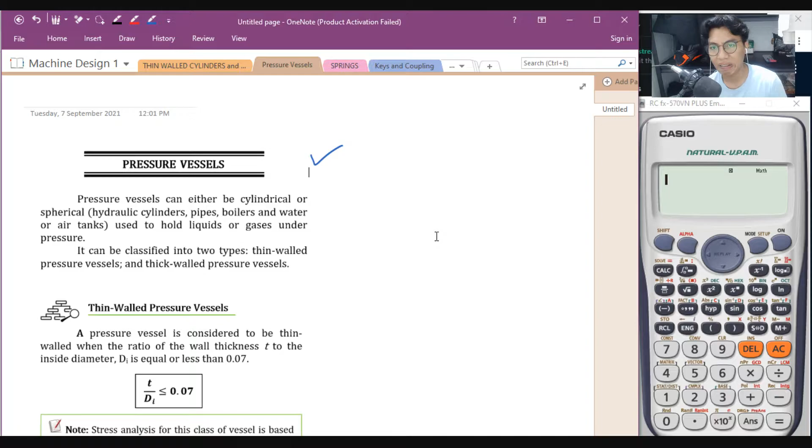Simple. A pressure vessel is considered thin-walled when the ratio of the wall thickness T to the inside diameter is equal to or less than 0.07. Anything beyond 0.07 - the ratio of your thickness to your inner diameter - you can say it is now a thick-walled pressure vessel. So before you solve a pressure vessel problem for its bursting pressure or the stress of bursting...

Check first if it falls correctly within the boundaries of the ratio of 0.07. If it passes that ratio, or is lower or equal, you can say it is thin-walled. If not, then that is thick-walled.

So there are two types of equations for thick-wall and thin-wall. But note, the stress analysis for this class of vessel is based on simple stresses only, or if the stress is uniform in distribution.

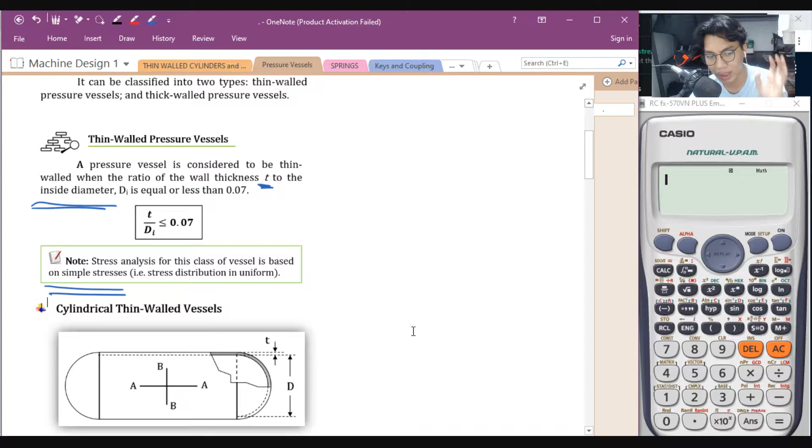Okay, let us go with the cylindrical thin-wall pressure vessel. Sir, what is cylindrical? Again, going back to your solid mensuration, cylindrical pressure vessels are those which have a head or a base that is circular.

Circular is your base. And that is stretched to an element or a height that is perpendicular to it. So when you make a pressure vessel, it does not come simply - it's not a cylinder right away.

For large pressure vessels, it comes from a thin sheet of metal that is formed into cylinders or into spheres. And that material will have a certain thickness, based on the bursting pressure or the amount of pressure that it will contain. We're not allowed to use a material that will not pass the test for where we will use it.

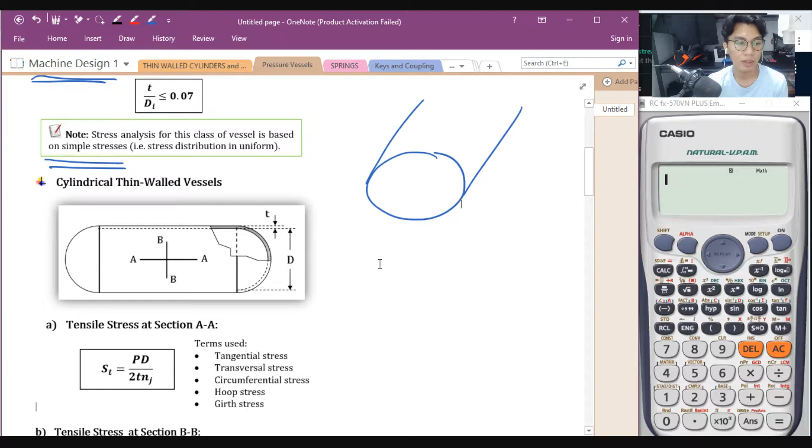Now, let us talk about the tensile stress at section A-A, this section here. What is that called? Is it longitudinal? And what is the term for B? Is that latitude?

Horizontal or vertical, longitudinal or tangential. Let's discuss that later. Now, if the stress is at section AA or horizontal, we call that the tangential stress, the transversal stress, the circumferential stress, the hoop stress, or the girth stress.

Mostly, this is our topic here. This is what's always used in problems: the tangential stress and the hoop stress of the material or of the vessel.

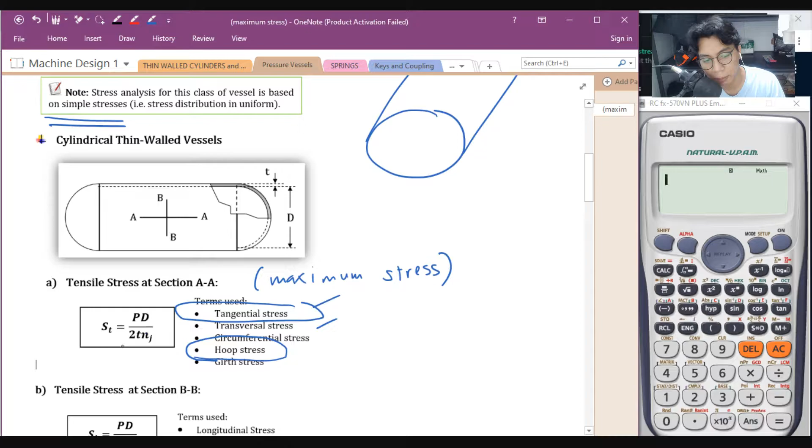Tangential means your stress will touch only one point on your outer boundaries. And we call this the maximum stress that a vessel can contain. Why maximum? Because your divisor is low, which is only twice the thickness of your pressure vessel.

So when we say maximum stress or the tensile stress, other terms could be tangential, transversal, circumferential—since it's within the circumference—the hoop stress, and the girth stress. The maximum stress is equal to PD over 2T multiplied by NJ. What is NJ?

NJ is the weld efficiency, or simply it can also be called joint efficiency. Commonly, when it's not given in the problem, we assume this as 100%. If it's given, plug in that value. Why is it called weld efficiency? That is the rating of the joint and weld.

The next one is the tensile stress at section BB. What do we call that? Longitudinal—standing up, longitudinal. That is the minimum stress that your pressure vessel can contain, also called longitudinal. Remember, the most terms used are for the maximum stress, while longitudinal or minimum has the fewest.

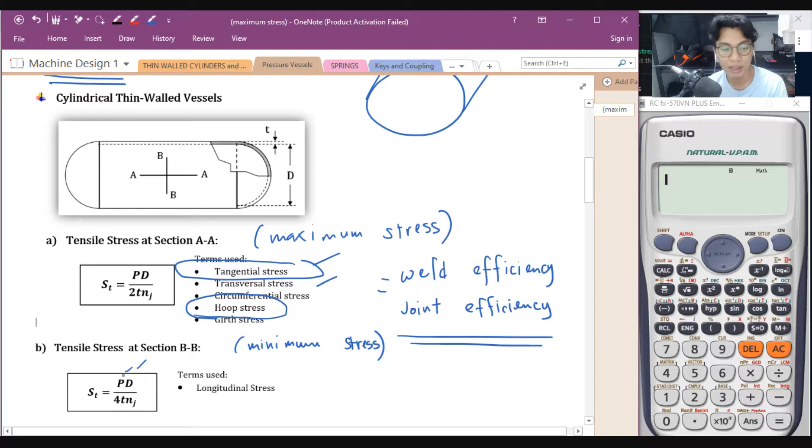Given by the formula, ST is equal to PD over 4T, NJ, where NJ is the weld efficiency or joint efficiency.

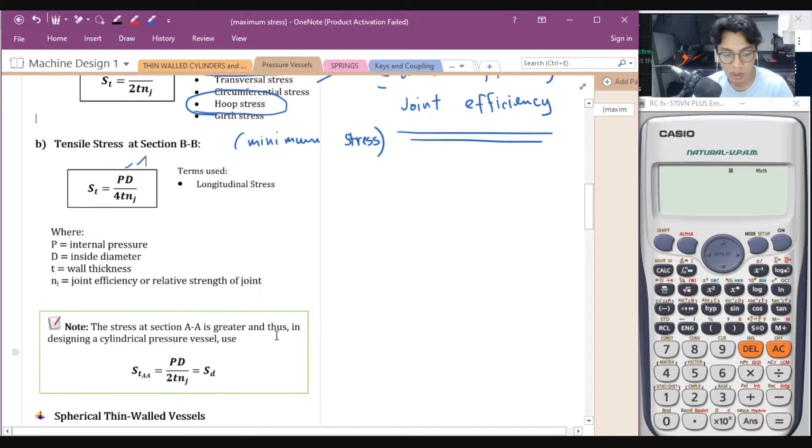We note that the stress at section AA is greater, and thus in designing a cylindrical pressure vessel, the design stress is always the maximum stress that your pressure vessel can contain. You cannot design based on the minimum. Why? Because if it's minimum and you exceed it, your pressure vessel will burst. You must always design for the maximum value it can contain.

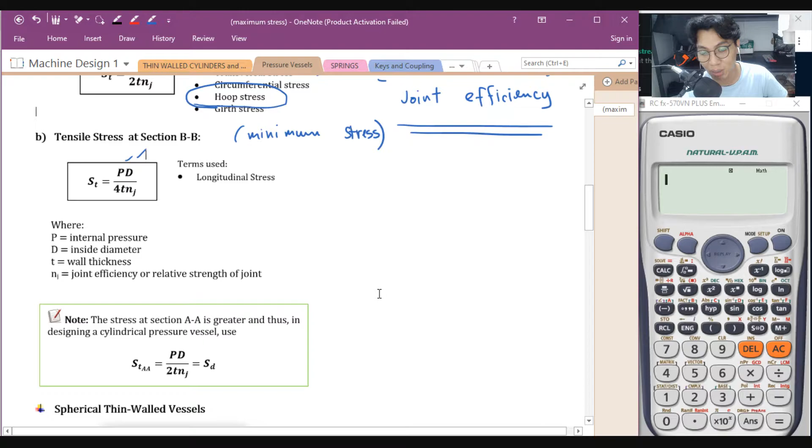So this is the formula for your design stress. The design stress is also the maximum stress: tangential, transversal, circumferential, hoop, and girth. Now let us go with the spherical thin-walled pressure vessel. Spherical, from the word itself, is sphere.

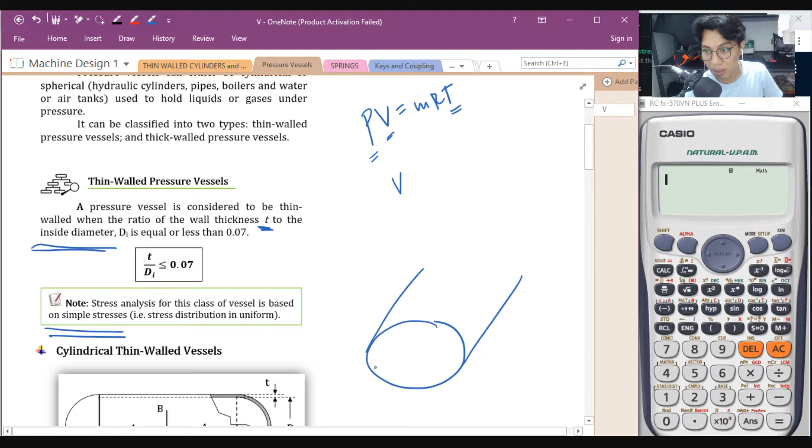Since it's an ideal gas, you'll use the ideal gas law. What is the ideal gas law? To remind you, that is PV equals MRT, where the mass is contained inside the cylinder, and after compressing it, you have temperature, pressure, and volume. But sometimes what's given is volume, in terms of the volume contained inside the cylinder, since gases and liquids take up the space they are contained in.

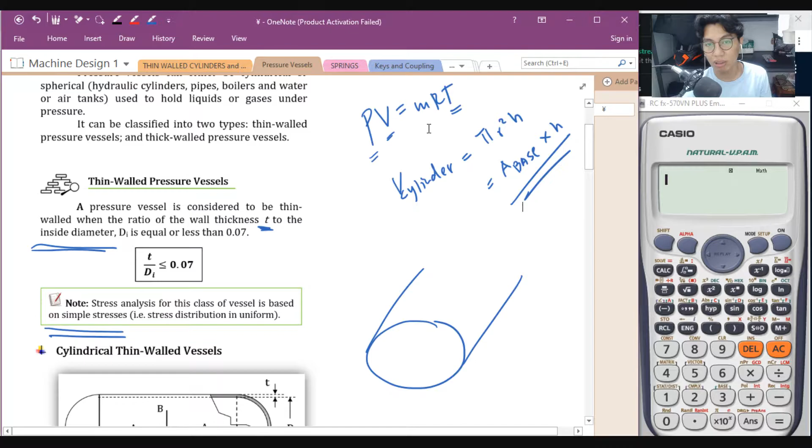So the volume—for a cylinder, going back to your solid mensuration, the volume of a cylinder is pi r squared h, or the area of the base times height. Take note of that—you will encounter problems that mix in thermodynamics, which is very basic.

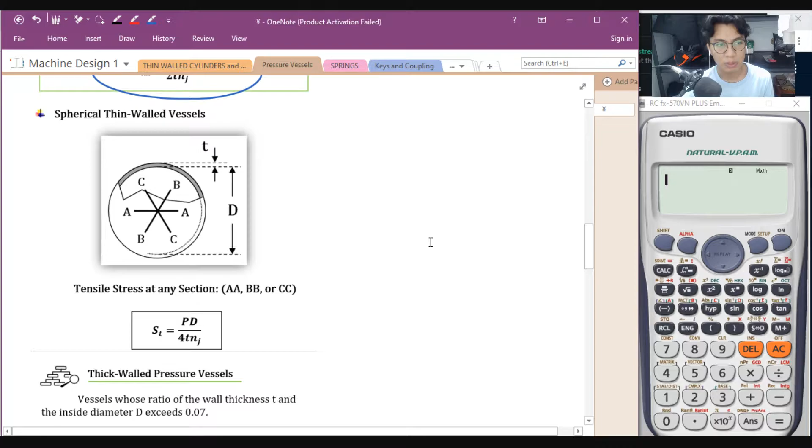Now, the spherical thin-walled pressure vessel. I also don't remember the volume formula for that. It's very basic for a solid. For a sphere, that is equal to 4/3 pi r cubed.

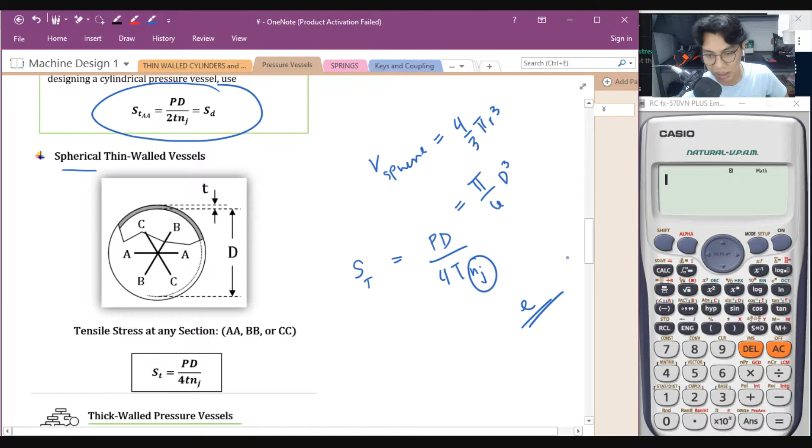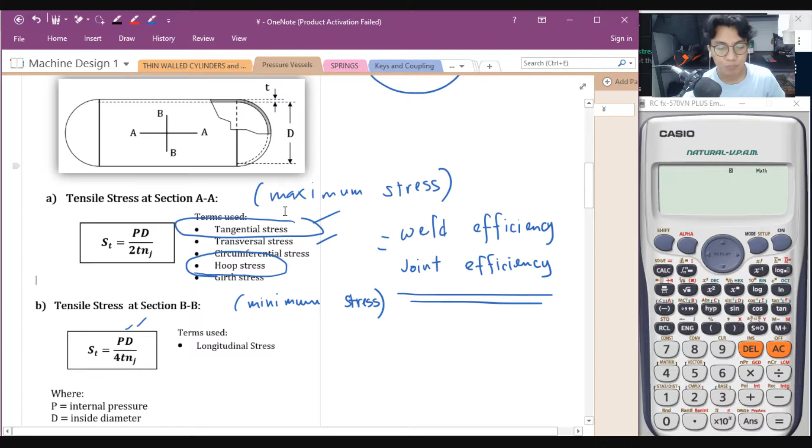Now, it's very easy for thin-walled. How about our thick-walled pressure vessel? Now again, for a thick-walled pressure vessel, the ratio of the thickness of your plate to its inner diameter is greater than the ratio of 0.07. You can say it is thick-walled.

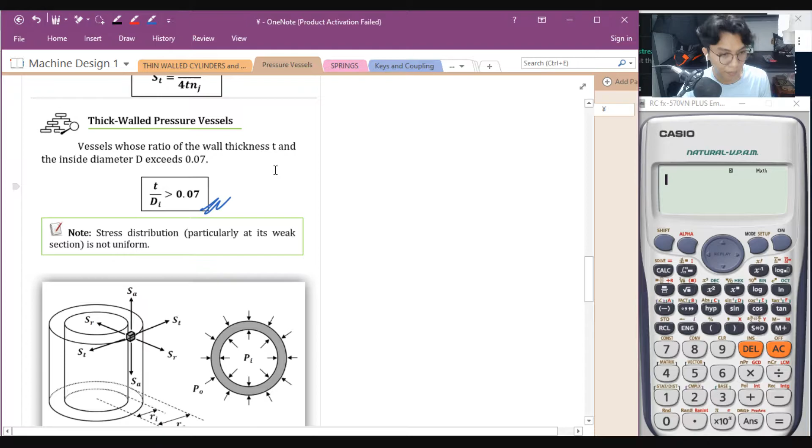You can say it is thick-walled. Now, we note that the stress distribution particularly at its weak section and it is not uniform.

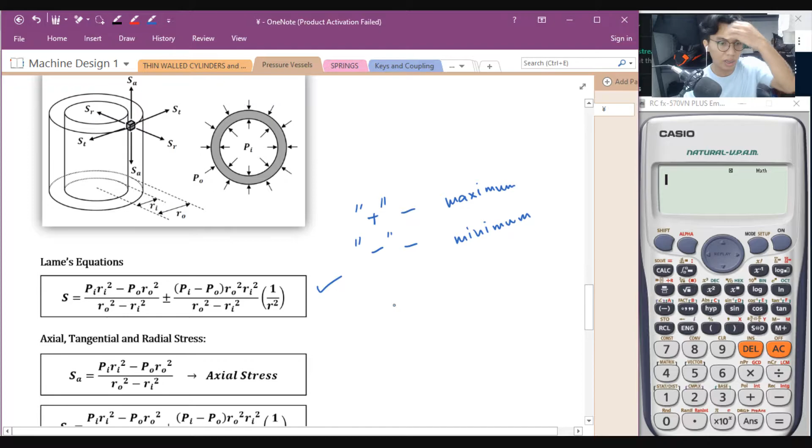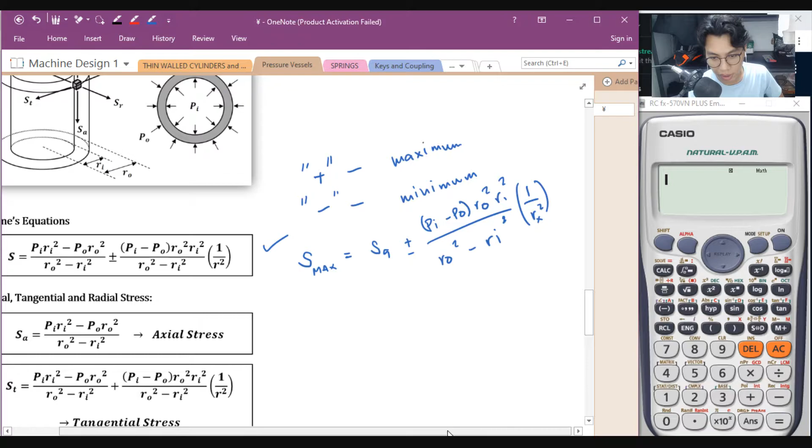When what's given is inside, use inside values; when what's given is outside, use outside values. It becomes maximum when plus, minimum when minus. For tangential stress, remember that is maximum. For radial, that is minimum.

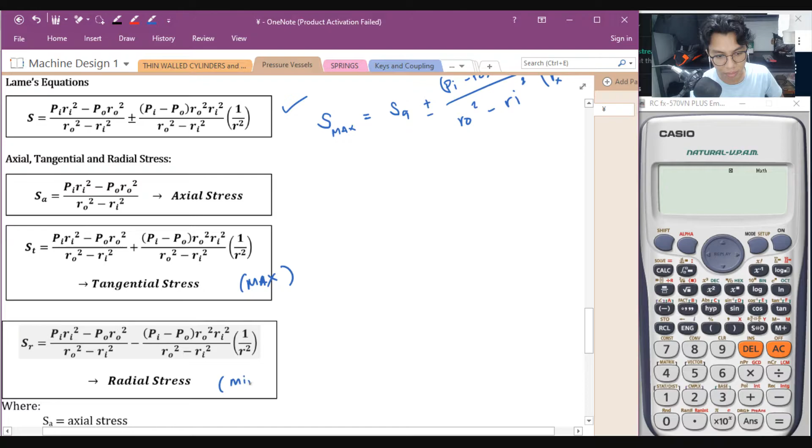How does it become minimum? That's with R. Consider Ri if the inner surface of the cylinder is considered, and Ro if the outer surface of the cylinder is considered.

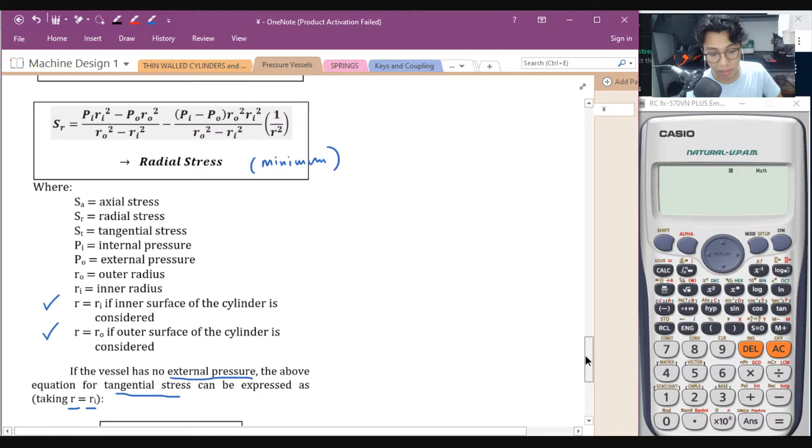If the vessel has no external pressure, the equation for tangential stress can be expressed taking R as Ri. If tangential and external are not specified, you take Ri.

But first, you have to check for the thickness. Sometimes you need to get the thickness first, given the tangential and the inside values. How will you do it?

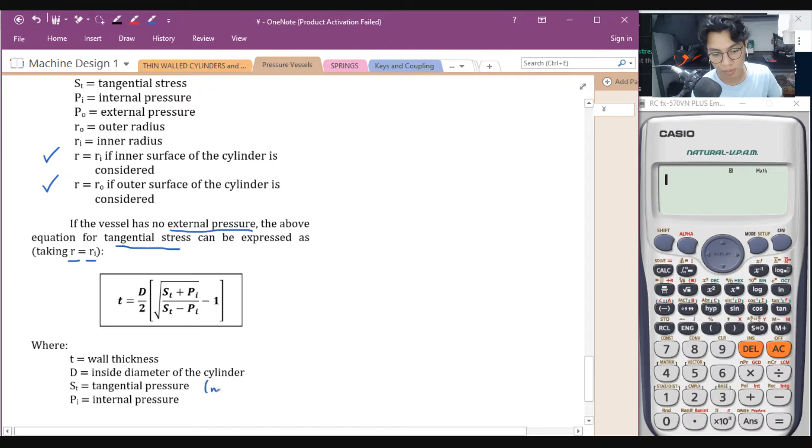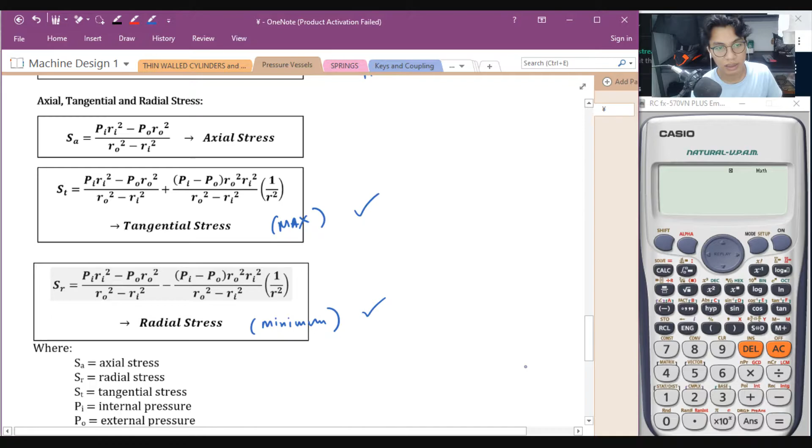That's tangential or maximum - maximum pressure or maximum stress it can handle. The maximum is tangential, the minimum is radial, and the one in front, piriporo, that is axial. That's it.

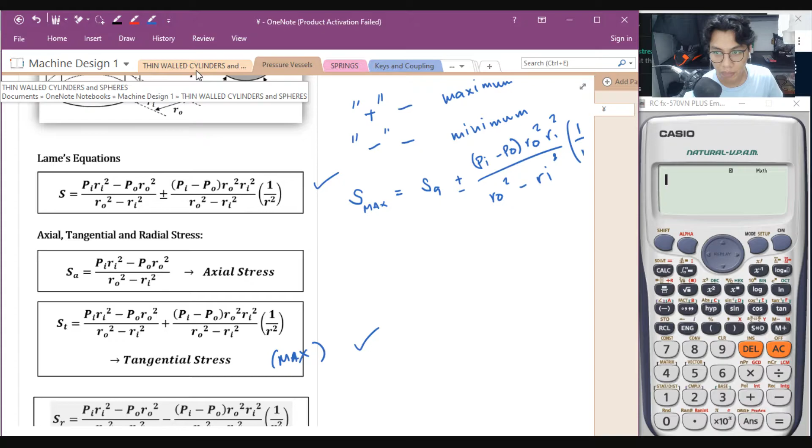Now, for bursting pressure problems, you need to get the design stress and its ratio to the internal stress, equate it to the given tensile stress and the bursting pressure in order to get either the bursting or the design pressure.

Now, for thick wall vessels, always, the one in front, piriporo, is the axial stress. The radial stress is the minimum pressure. And the tangential is the maximum pressure.

The problem states: determine the maximum pressure of a thick-walled vessel designed to have the following parameters. Or it may say: determine the stress of the following thick-walled pressure vessel designed to have the following parameters.

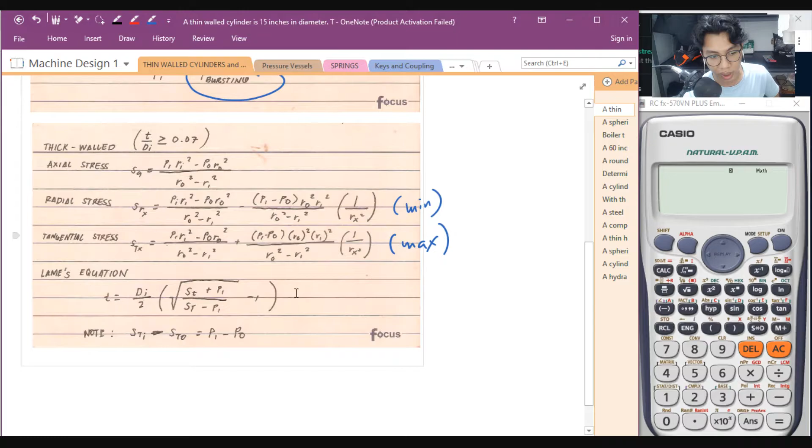Now, for Lame's equation, ito na yung binigay dyan. We note that STI, or the tangential stress measured on the inside minus on the outside, is equal to... laging mas mataas yung pressure stress on the inside kaysa sa outside, equal to P, or the pressure inside and then the pressure outside. Okay?

Sinamari ko na. And for problem number 1, a thin-walled cylinder is 15 inches in diameter. The internal fluid pressure in the cylinder is 150 psi. The wall thickness is 0.125 inch. Find the induced stress in the cylinder wall. So, ano ba sinabi dyan?

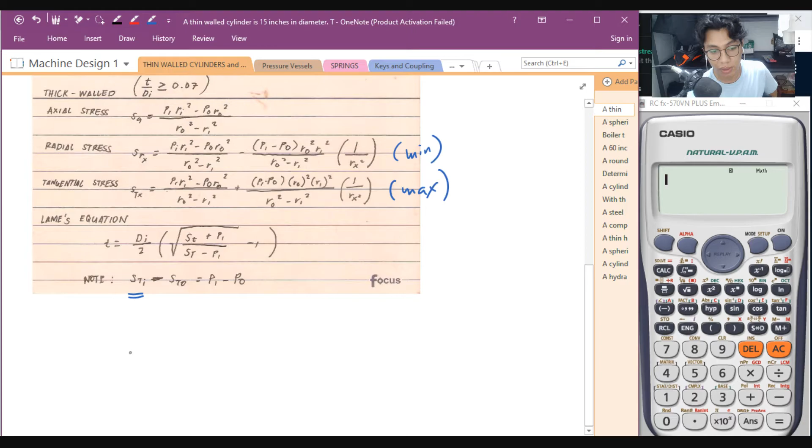Walang sinabi if maximum or minimum. So, you always have to assume that it is maximum. So, ST is equal to PD over 2TE. O, may sinabi bang E dyan? Wala. So, you assume that it is 1.

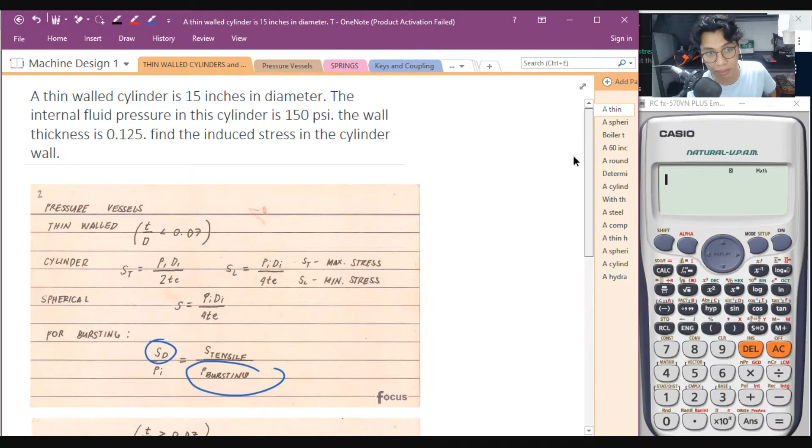So, internal pressure is 150 psi. The internal diameter is 15 inches. Twice of the thickness, which is 0.125 inch, multiplied to 1, which is wala namang binigay na joint efficiency. We cancel all the same units, yung inch and then inch. Natira is pound per inch squared, or PSI pa rin.

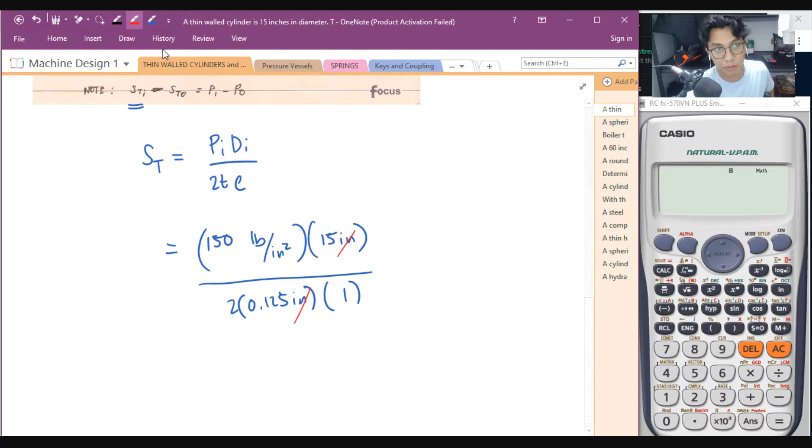So, we calculate the value: 150 times 15, divided by 2 times 0.125. The answer is 9,000 PSI. Very basic lang yan. 9,000 PSI.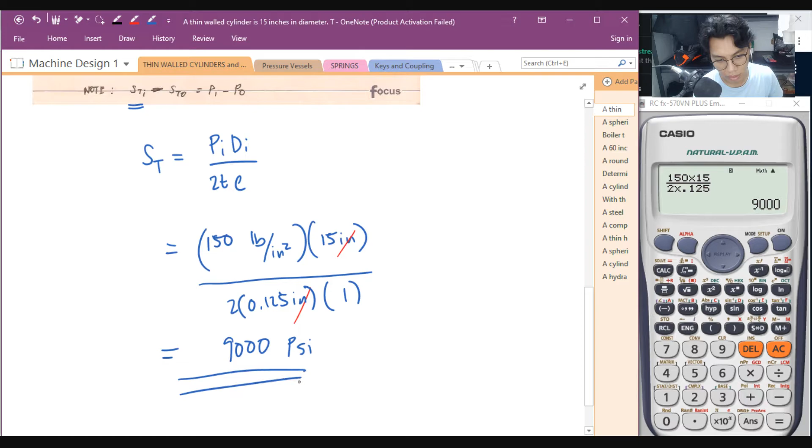Next problem. A spherical pressure vessel has a 480 millimeter diameter. The internal pressure is 10 MPa. You determine its wall thickness. The allowable stress in the material is 80 MPa, and the joint efficiency is 80%.

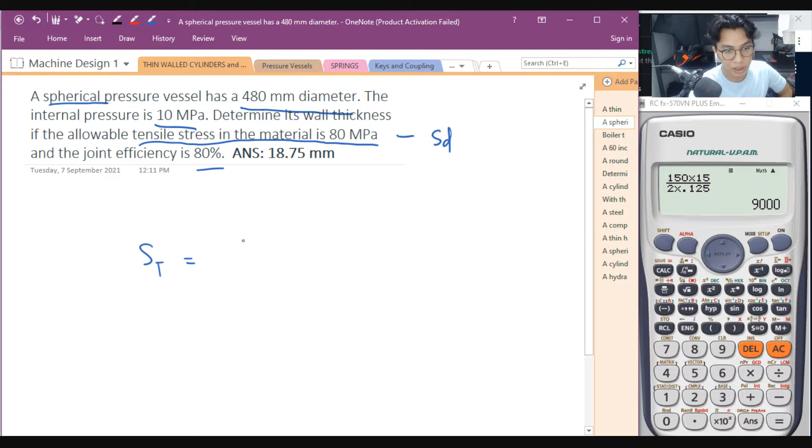Ngayon, ano dito ang design stress mo? Ito yun, no? Sinasabing allowable tensile stress. This is the design stress. Spherical na to, so you will assume that ST is PD over 4TE. Ngayon, anong hinahanap dito? Yung wall thickness. So, we reform the equation, cross-multiply.

So, T, thickness, is PD over 4STE. Okay, we can solve for the value of T, where T is equal to P. Ano ba yung binigay sa'yo dyan na pressure internal? That is 10 MPa,

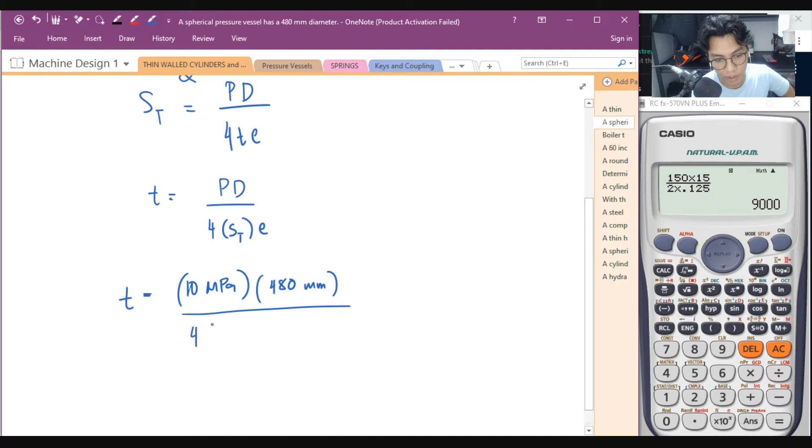multiplied to the diameter, that is 480 millimeters, divided by 4 times ST, that is 80 MPa, divided by joint efficiency, 0.8 kung di ako nagkakamali. Ayun, 0.8. So, very basic again. Yung thickness niya is 10 times 480, divided by 4 times 80 times 0.8.

The answer is 75/4, or 18.75 mm. Very basic pa yung mga problems natin dito.

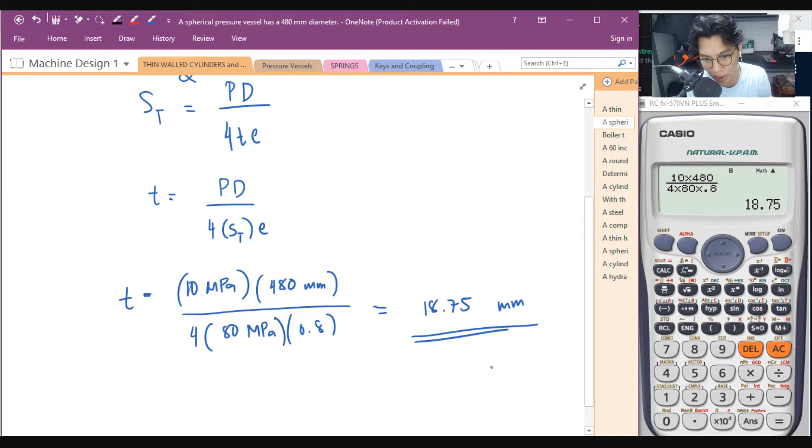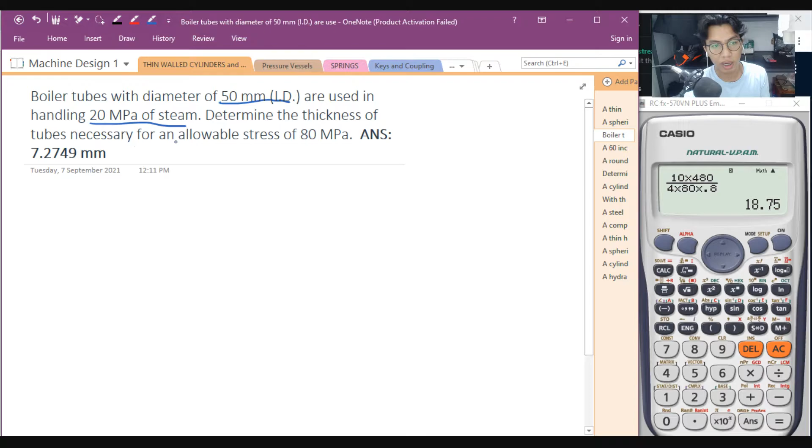Another one. A boiler tube with diameter of 50 millimeters, internal diameter, is used for handling 20 MPa of steam. So, yun, ito na yung internal steam na hinahandle niya. Determine the thickness of the tubes necessary for an allowable stress of 80 MPa. Assume the joint efficiency is equal to 1, kasi wala naman binigay. Okay? Thickness again. Thickness is PD over 4 ba yan?

So, allowable stress, laging design stress. Hindi po yan 4, lagi yang 2. Pag design stress, that is the maximum stress. Okay? That is 2SDE. So, the thickness is equal to P, internal pressure of 20 MPa, as diameter, which is 50 mm, divided by twice nung SD, 80 MPa, tapos 1.

Cancel the same units, you'll arrive with the answer. So, 20 times 50, that is 1,000 if correct ako. Tapos, 2 times 80. So, that is 6.25 millimeters of thickness.

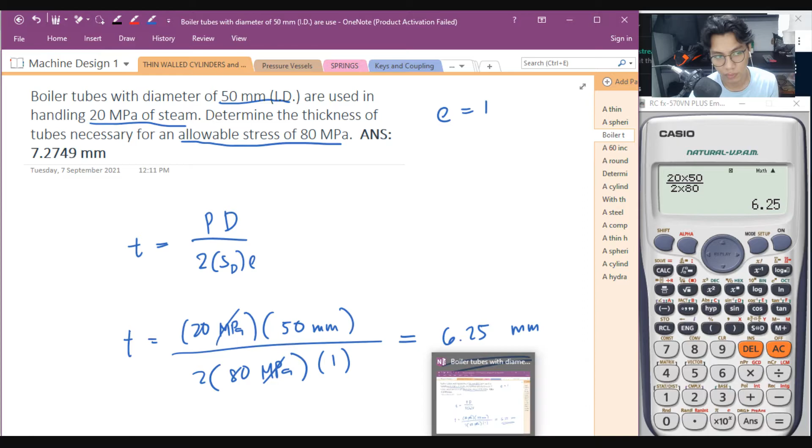Very basic talaga. Another one. A 60-inch diameter steel pipe, 3/8-inch thick, carries water under a pressure head of 550 feet. O yan ang problema mo. Determine the hoop stress in the steel. Hoop stress is simply maximum.

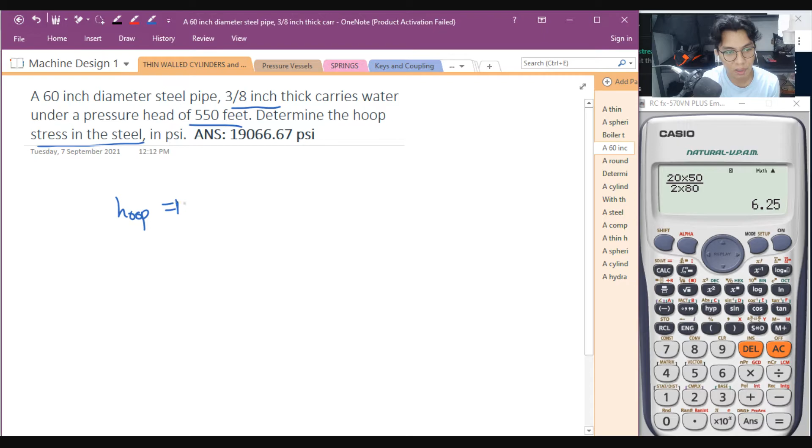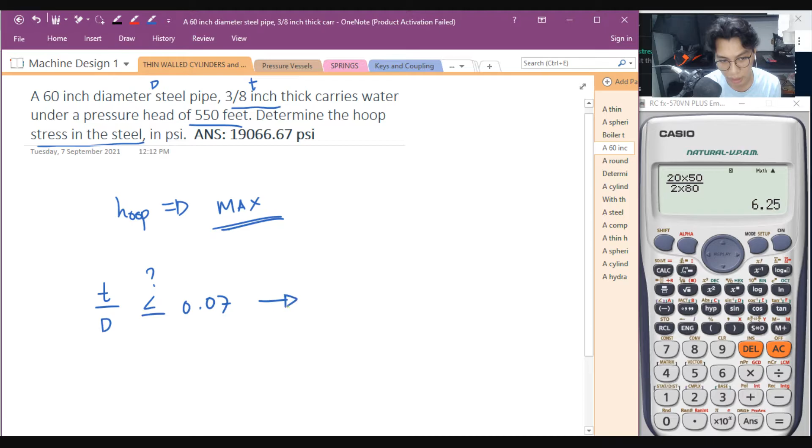Okay? Binigyan kang diameter, binigyan ka ng thickness. Ngayon, pag binigyan ka una niyan, you are always to find out if it is thick-walled, okay, or thin-walled. So, T over D, tignan natin if that is less than or equal to 0.07. We check first, okay? Yung thickness niya, that is 3 over 8, tapos 60. Equal to. Tignan natin kung that is less than 0.07.

So, this is 3 over 8. Lagi mong gagawin yan, ha? Over 60. If that is less than 0.07, that is 0.00625. Ibig sabihin, this is less than 0.07. Check. Less than 0.07. Therefore, it is thin wall.

So, ano nga hanapin natin dyan? Meron tayong pressure head ang binigay sa'yo. The internal pressure is, hanap dyan? The hoop stress. Ayan. Internal pressure is in heads. In head.

Sir, hindi ko na matandaan. Oy, nag-fluid mechanics kayo sa akin. Madali lang i-translate yan. Ilang meters of water? Carries water. Ayan, water. Naka-pressure head ka. So, ibig sabihin, head, okay, is equal to density ng water.

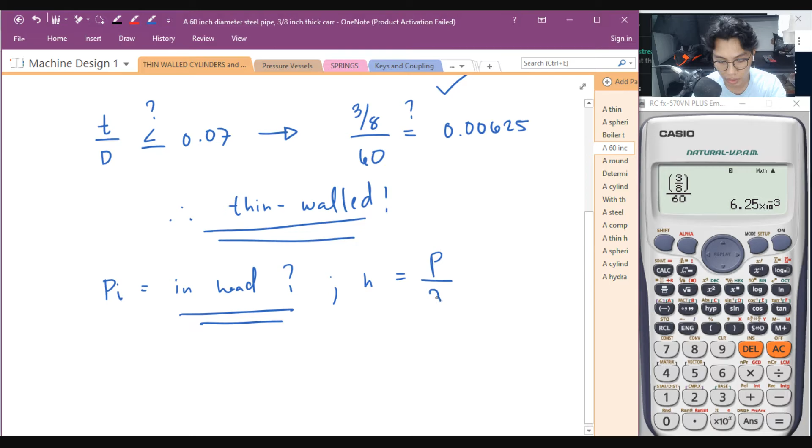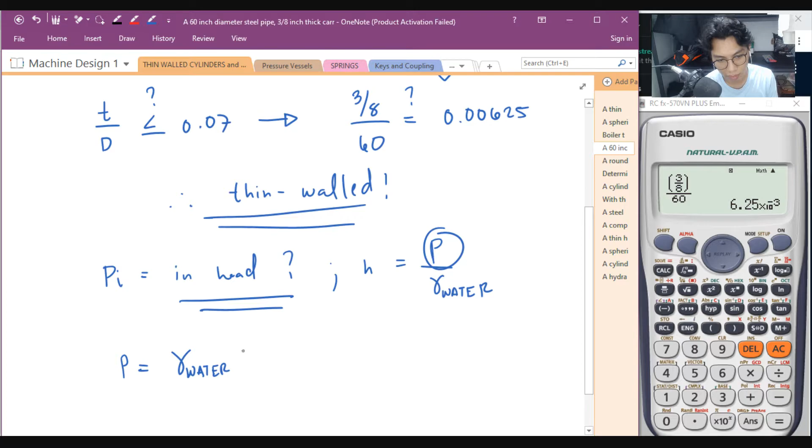Hindi. Pressure over, ano to? Specific weight ng water. Ito ang kinukuha mo. Okay? Ibig sabihin, the internal pressure there is yung sa water, specific weight of water, multiplied to the height ng water. Very basic po. Masosolve na natin yung hoop stress.

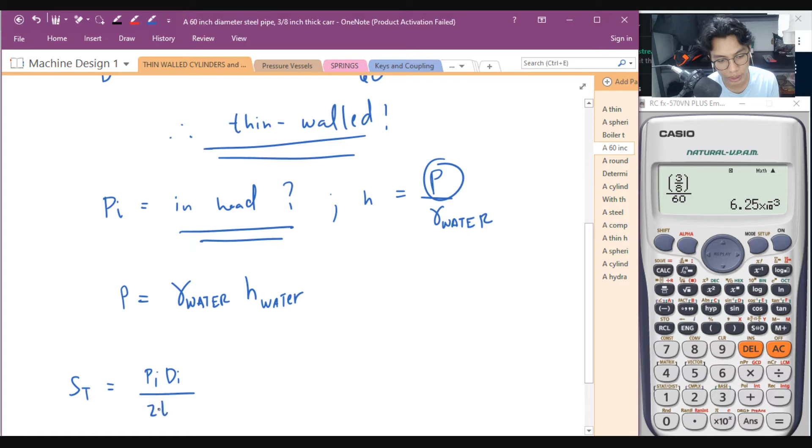So, the maximum stress is equal to P D over 2Te. Maximum eh. Where pressure is in terms of head. Sa water, multiplied to the head, multiplied to D, over 2Te. Okay, hindi ko na matandaan, sir, yung sa water.

Sa water, that is equal to 62.4 or 64.2. Sige nga, nililito ko kayo. Pound per feet cube. Yan yung specific weight of water. If you can remember. Okay? 62.4 pound per feet cube.

Sir, hindi ko pa rin tanda. Pwede rin naman 9810. Newton per meter cube. Kaya lang magko-convert ka pa. Ito, direkta na eh. Okay?

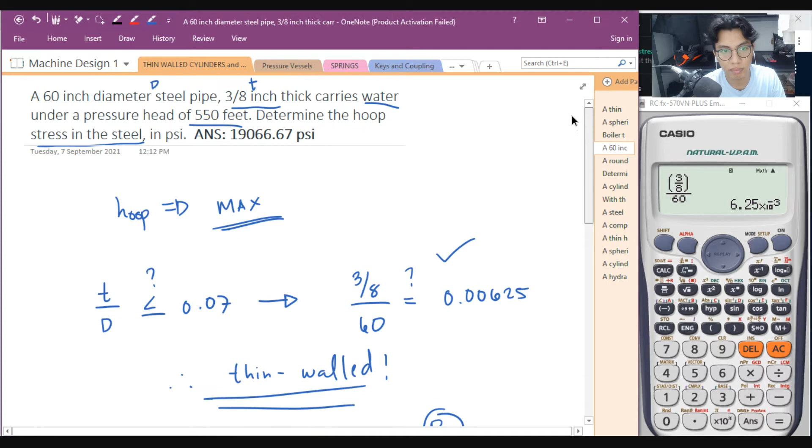Yung head ng water, 550 feet. Tapos D, in diameter, 60 inch. Over 2. Yung thickness, this is 3/8 inch. And then the joint efficiency is, binigay ba dyan? Wala. So, 1. Ang problema mo dito, dapat in PSI.

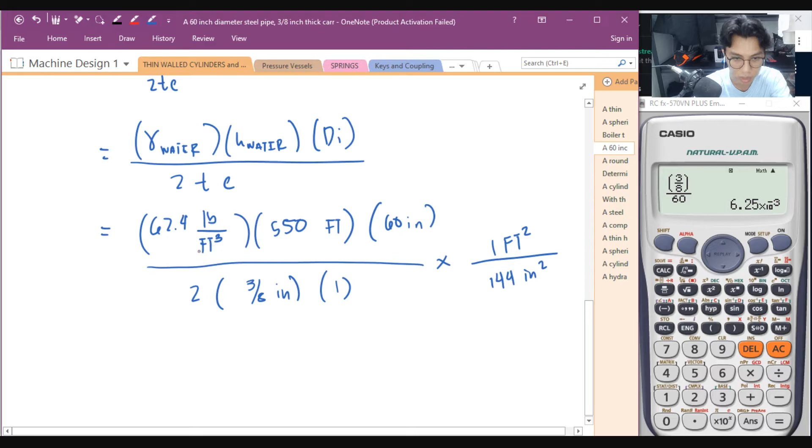So, meron tayong conversion factor dyan. That is 1 feet squared per 144 inch squared. We cancel all the same units. Yung feet squared, inch. Ang lalabas is pound per inch squared.

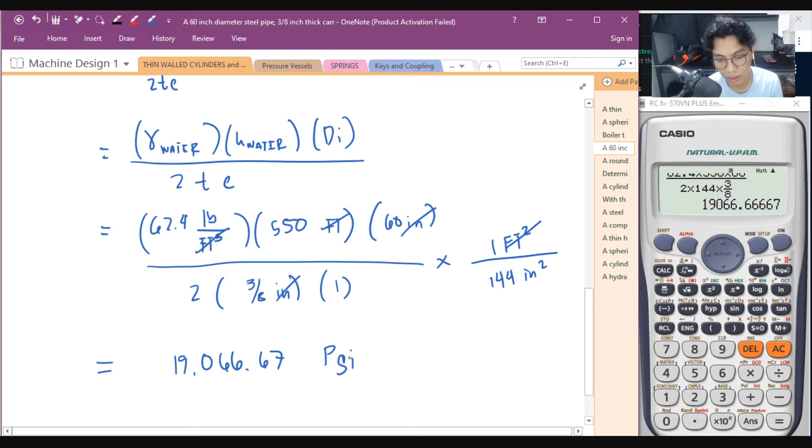We can calculate for the design stress or the hoop stress. So, 62.4 times 550 times 60 divided by 2 times 144 times 3/8. The answer will be how many? How much yung stress niya? 19,000 PSI. So, 19,066.67 PSI. That is now the hoop stress.

Next problem. Very basic lang yan, no? Very basic. A round vertical steel tank. Round vertical, ibig sabihin cylindrical. Has an inside diameter of 3.5 meters and a height of 7 meters.

Problema, binigay sa iyo volume. It contains gasoline with a density of 740 kg per cubic meter. If the allowable tensile stress, meron kang design stress dyan, determine the minimum thickness required. Minimum ha? Minimum. So, binigyan ka ng allowable tensile stress. Hindi sinabi sa'yo minimum. Okay?

Minimum. Saan mo kukunin yung minimum? Sa maximum ba or sa minimum stress? Dalawa ang pwede mong pagkunan yan. But first, you have to put the equation. So, design stress is equal to P D over 2T.

E. O ngayon, vertical steel tank. Binigyan ka ng height and binigyan ng inside diameter. Problema mo dyan, yung internal pressure. Okay? How will you get the internal pressure? Sige nga. Binigyan ka ng volume. Okay?

So, the volume of the cylinder. Ang problema mo dyan. Meron kang kilogram per meter cube. Meron kang density. Okay? So, makuha yung pressure. Sige nga. Tignan dito mass over volume. Pwede natin tong gamitin para makuha natin yung mass niya ba? Sige nga, mag-isip tayo. This one,

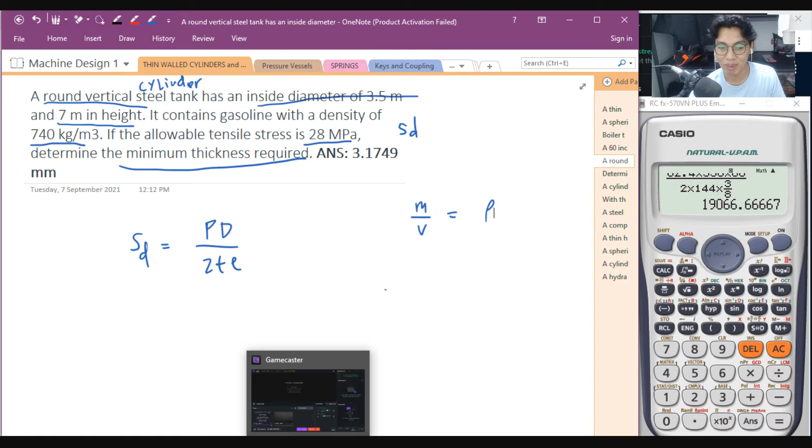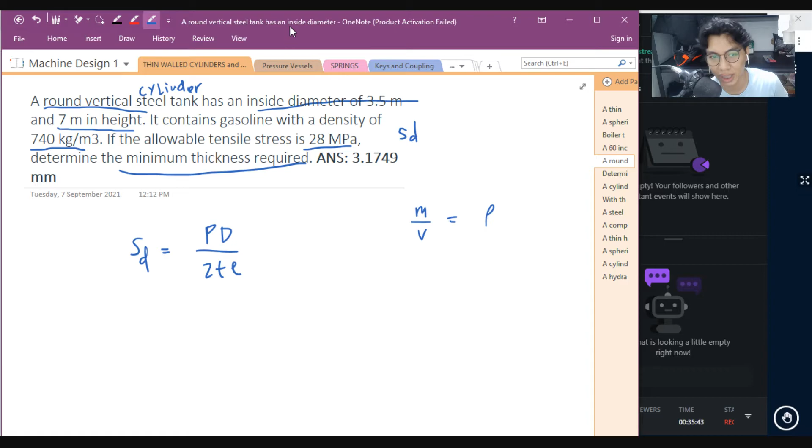Dadaan ka pa ba dito sa mass over volume? Can be. Pero ang pinakamadali dito, that in your, okay, fluid mechanics, lahat naman kayo nag-fluid mechanics natin. Remember that pressure in a cylinder or in a tank is always given by the specific weight of the material or the substance multiplied to the height it contains. Okay? Tandaan nyo ba yan?

Tandaan nyo pa? So the internal pressure will be equal to the pressure equal to the specific weight of the material or the substance multiplied to the height it contained. Okay? So, ang tumataas, di ba tumataas ang pressure? Okay. No matter what the volume of the tank will be.

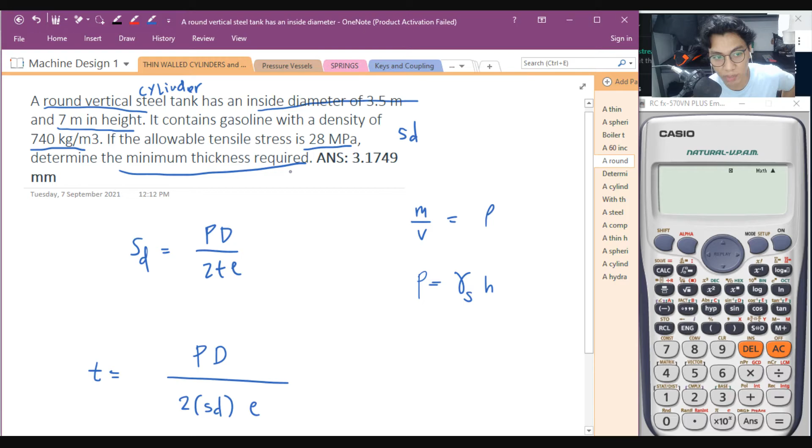So, binigay sa yung design stress dyan. Anong inaanap natin? The minimum thickness. So, reform the equation like this one. P D over 2, the design stress, times T. Minimum thickness ha, titignan natin kung nasaan ba yung minimum thickness. So, dalawa yung operation na gagamitin natin. We could use this one. We could also use this one. P D over 4TE. Ano yung minimum thickness dyan sa dalawa?

Pero kung ako, titignan ko lang, alam ko na kung nasaan yung minimum thickness. Okay? Pero papakita ko na lang sa inyo kung paano din.

So, the thickness, yung pressure given dyan yun sa gasoline. 740 kilogram per cubic meter. Ang problema dito, ito ba, diba that is rho times G? Multiply mo ng gravity, 9.81 meter per second squared. Magiging Newton per cubic meter to.

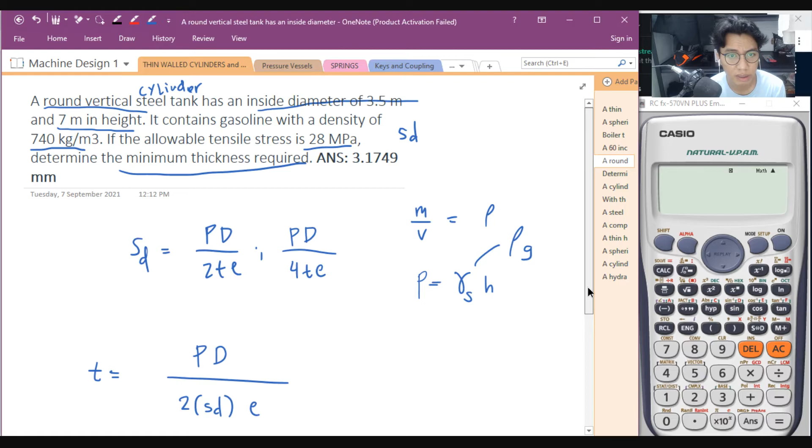Tapos, multiplied to diameter. May diameter mo dyan, 3.5 meters. Tapos, meter. Okay? May Newton to. Pag pinagsama mo, may masosobrahan ka lang dyan na Newton per cubic meter. Tapos, 2 SD is Newton per millimeter squared ko na lang. 28 Newton per millimeter squared multiplied to 1. Okay, cancel all the same units. Magiging Newton per millimeter cube to, meter cube.

Density times height. Kulang pa ako ng height. Ayun, nandito na pala. 740 times 981, 9.81. Newton per kilogram meter, Newton per meter cube. Tama. Tapos cancel yung meter. Ayun, baliktad pala. Baligtad ako ng lagay. Dito.

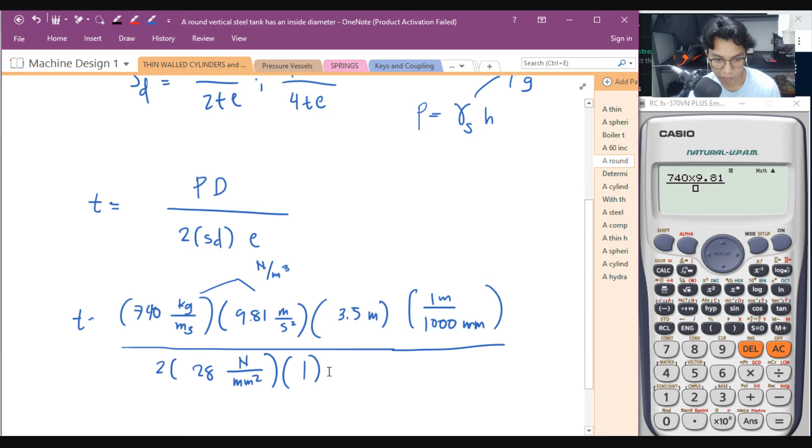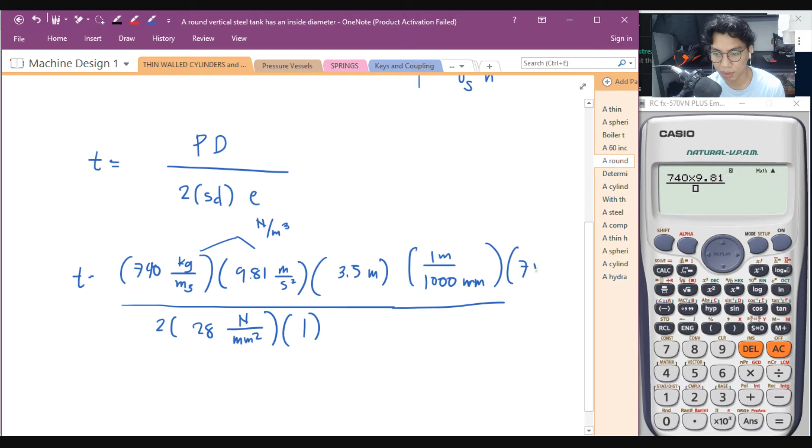Maging meter cube dapat. Newton, meter cube. Ba ako nagkamali dyan? Height. Tama, 7 meters, 3.5 ang ginamit ko. Yun, yung height pa pala. Kulang pa ako ng height na 7 meters. Ayan, nahanap ko yung height eh. Naduduling na ako eh. 740 times 9.81 times 3.5 times 7 divide by 2 times 28 times 1,000 millimeter na matitira dyan.

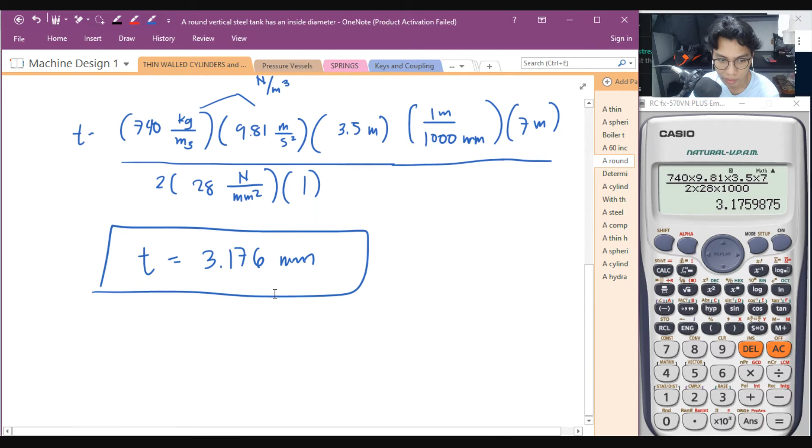So, the thickness will be 3.176 millimeters for the thickness. Hindi pa natin sure ha, pwede rin kasing gamitin ito, 4TE. Pero laging ang minimum thickness mo dun sa greatest or sa maximum pressure na meron ka. Okay? So, that is now the value.

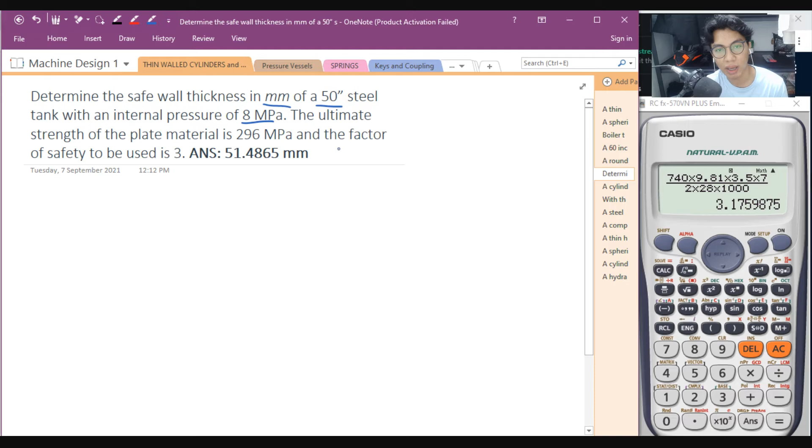Next one, determine, meron pa ba? So, ilan pa yan? Dalawa pa. Determine the safe wall thickness in millimeters of a 50-inch steel tank with an internal pressure of 8 MPa. The ultimate strength of the plate material is 296 MPa and the factor of safety to be used is 3.

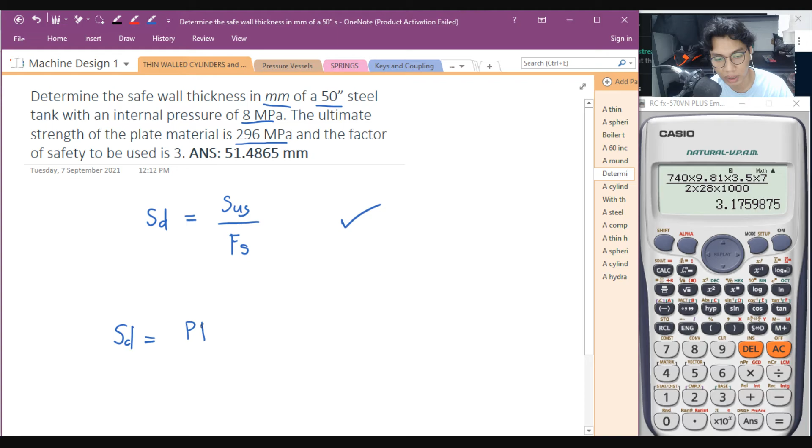So, SD, okay, laging ganito. Factor of safety divide by, mali pala. SUS divide by factor of safety. Yan, check, that is SD. Where ang hinahanap dito, safe wall thickness. Okay? Safety to be used is 3. Ibig sabihin, the design stress ulit. Design stress is equal to PD over 2TE. Okay, where SD is SUS over 3, or the factor of safety.

O ngayon, ang hahanapin natin dito is safe wall thickness. Cross-multiply na lang natin. So, safe wall thickness now is T equal to PD multiplied to FS divide by SUS, 2T, 2E. Thickness is equal to P. Ang given internal pressure is 8 MPa. In diameter, that is 50 inches. May conversion factor naman tayo dyan to millimeter. So, 25.4 mm is equal to 1 inch. Factor of safety is 3.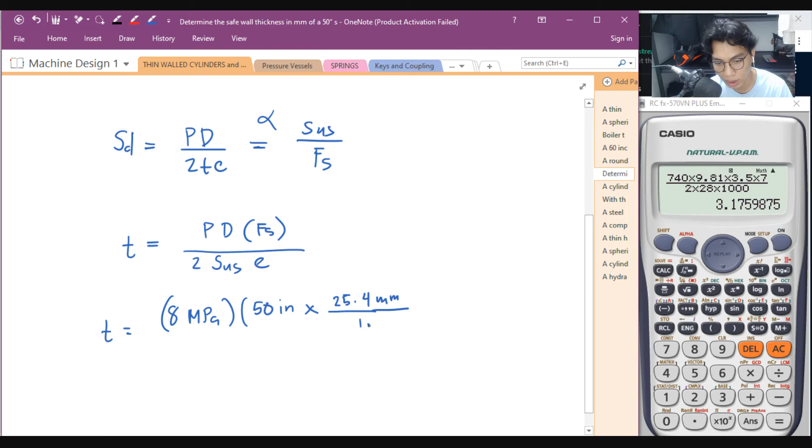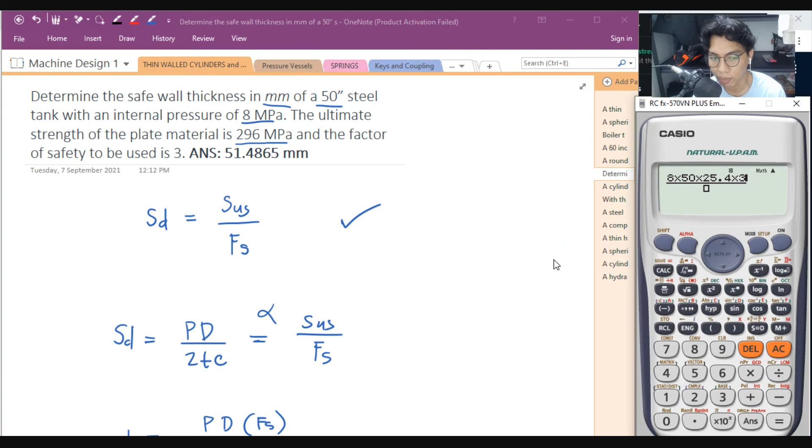Divided by 2. SUS mo is 296 MPa times 1. The safe wall thickness now will be, tignan natin kung tatama, 8 times 50 times 25.4 times 3. Ano ibig sabihin ng factor of safety mo? Ibig sabihin yung design stress mo is thrice, tatlong beses niyang kayang i-carry. Or, a third of your ultimate stress yung kaya niya i-carry ng material. Tapos, 2 times 296. The answer is, ilang millimeters?

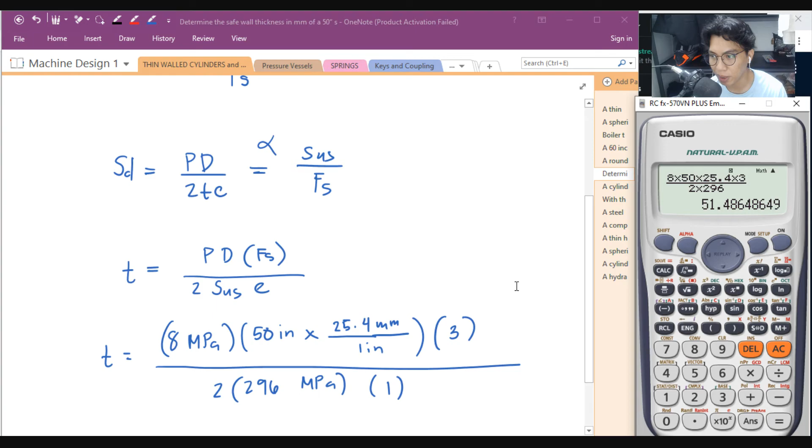51.4865 millimeters. The thickness is equal to 51.4865 mm. Approximately, pag nagsa-sizing ka, okay, 51.48, hindi na, 51.5. Pag sizing, wala namang kasing 0.48 na measurement. Ikaw na ang gagawa niyan kapag nagde-design ka or kapag ikaw magbi-build, ikaw na ang gagawa ng minor adjustments.

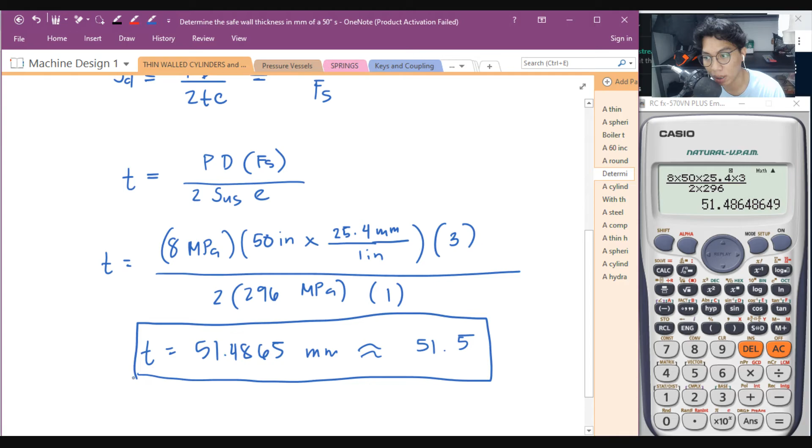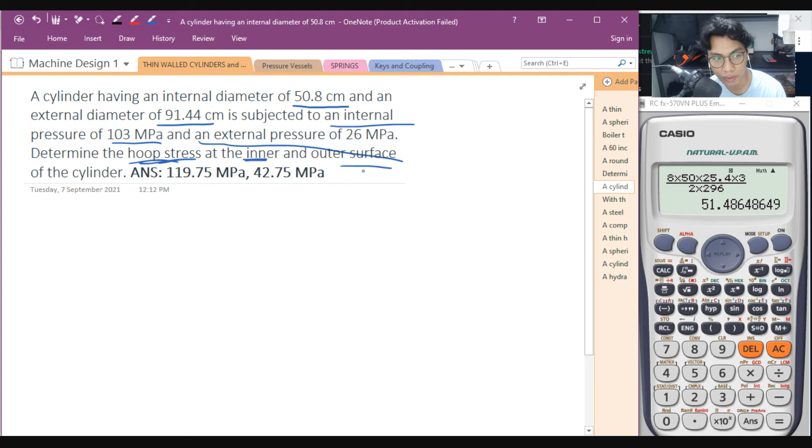So, the last one. A cylinder having an internal diameter of 50.8 cm and an external diameter, problema mo dyan, is subjected to an internal pressure, internal ang binigay, and an external pressure of 26 MPa. Determine the hoop stress. Ano po ba ang hoop stress? That is the maximum stress at the inner and outer surface of the cylinder. So, inner and outer, gagamitin mo sa R mo, binigay dito dalawa, Ri, gagamitin mo, yung Ro, gagamitin mo rin sa dulo. So, ang pinag-uusapan natin dito, hoop stress or maximum.

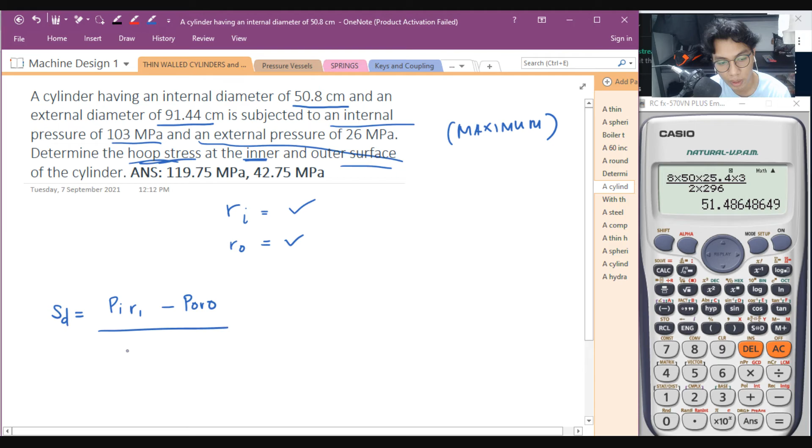So, that is equal to, yung design stress mo is equal to P, Ri, Poro, over, Ro, Ri. May natin lagay yung mga, maximum yan, kaya plus.

Pi minus Po, Ro, Ri, over Ro, Ri. Naka-square yan. Minus square, square, square, square, minus square multiplied to 1 over Rx squared.

Kaya lang sa Rx, kukunin natin itong dalawa. To solve natin separately.

So, SD. Yung P, internal pressure of 103 MPa. May natin yung unit, Newton per millimeter squared.

Ri, MPa. Ri, ano dyan binigay niya? In mm mo na lang. Pwede rin naman kahit di mo na i-convert, pareho lang naman ang unit.

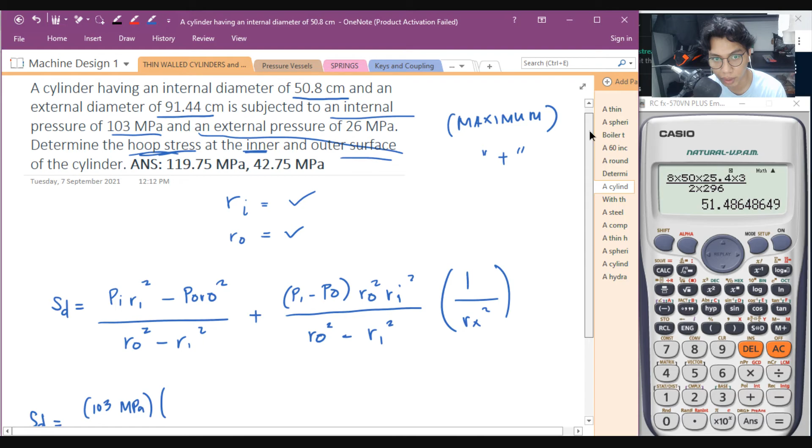Internal, that is 50.8 cm squared minus poro, that is, pag mahaba, tuturuan ko kayo ng technique dito. External, that is 26 MPa. Tapos, 91.44 cm squared. Part by part ka mag-solve.

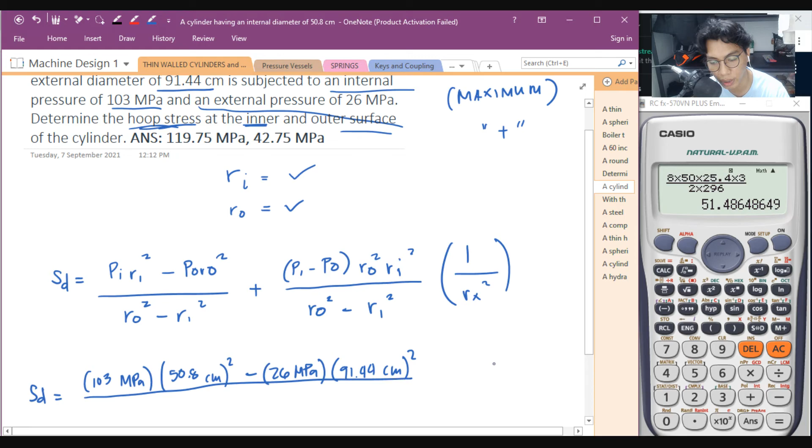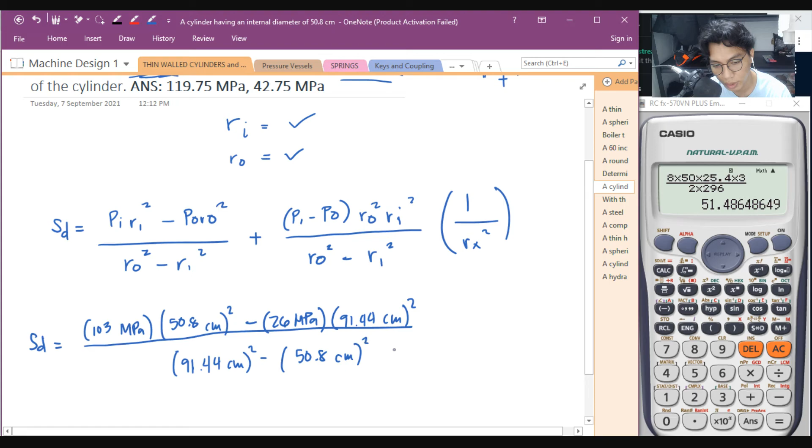Okay, first part ka muna. So, first part, ro, that is 91.44 cm squared minus Ri, 50.8 cm squared. Tapos, dulo, plus, Pi minus Po, 103 minus 26 MPa. ro, that is 91.44 cm squared mo, tapos 50.8 cm squared over ro minus ri.

That is 91.44 cm squared minus 50.8 cm squared. Tapos, multiply mo yung dulo, 1 over Rx. Unahin ko muna yung Ri, una muna yung Ri natin.

Inner, so Ri, diameter pala to. Divide by 2 na lang natin to. Okay? Tingnan natin. So, 50.8 divide by 2. Purahin ko muna lahat para hindi ka nalilito.

Diameter pala yung binigay dyan, hindi ko nabasa. 91.44 divide by 2. 91.44 divide by 2. 50.8 divide by 2. 91.44 divide by 2. 50.8 divide by 2. As Rx squared, dito, 91.44 divide by 2, 50.8 divide by 2.

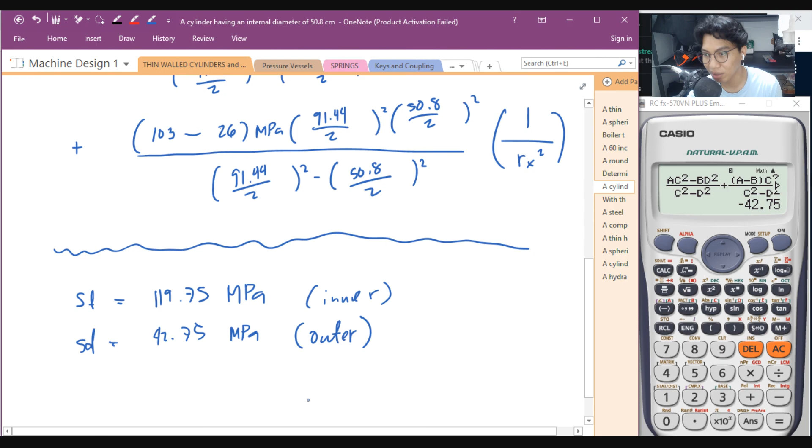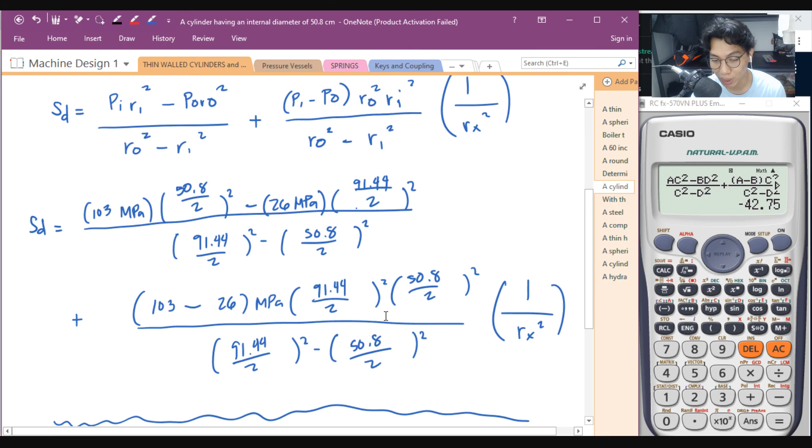Now, that wraps up the discussion for our pressure vessels. If you've got questions, feel free to ask. Ito na po yung pinaka-technique kapag gagawa kayo ng calculation ng thick-walled pressure vessels. Okay? That wraps up the discussion.